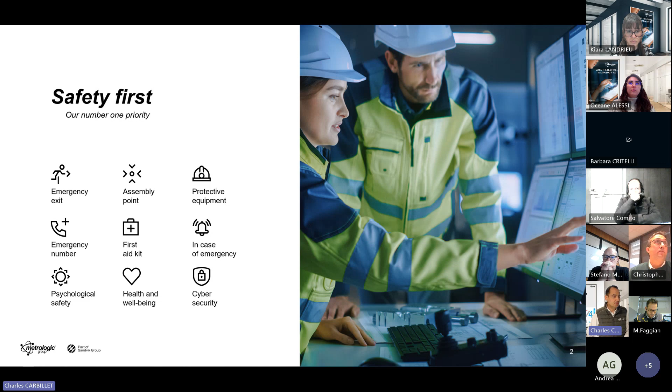Let's speak a little bit about Metrologic. Our headquarters is located in France, close to the Alps in Grenoble, since 1980, and we are still there, really focusing on 3D measurements, CMM retrofit, automation inspection, and inspection services. Now it's over 43 years of experience and knowledge.

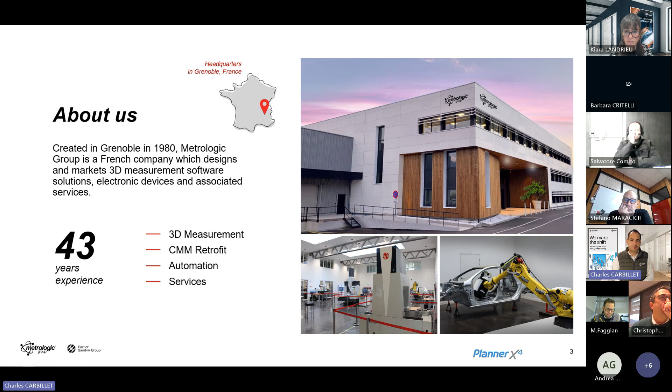You can discover our premises and our showroom on the bottom of this slide. We are located, of course, in Grenoble, France, but also in multiple regions, with 6 different sales offices in the world, as well as through our network of distributors everywhere that can assist you with support, inspection needs, software, services, training, or inspection programming if you need.

Our main activity is really focused on software, because we are completely independent of the device manufacturer. So we focus on inspection software, and we also have CMM retrofit hardware capability. And of course, services—for CMM programming or inspection issues, we have experts available for you everywhere in the world.

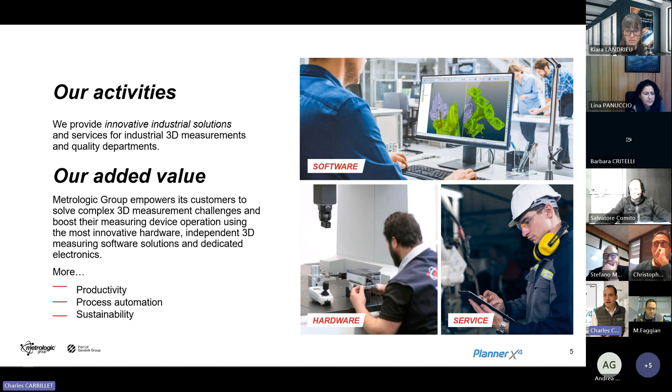Our main goal is to help you increase your productivity, get a robust process automation, and a sustainable solution. Our vision at Metrologic is to focus on manufacturing efficiency and be a collaborative digital platform addressing your daily 3D metrology issues, saving time and productivity, and offering you a good product at every hour of your daily journey.

According to this vision, we have an approach we call the end-to-end process in the inspection environment, with a prepare phase shown on the top right of the slide. Here you see the prepare phase, to prepare the inspection plan that will drive your program phase, execution phase, and the management of the data, which is the next phase—programming with our product Silma.

Execute with our product Metrolog, and manage the data according to connectors to different databases in your ecosystem, like QDAS, QDM, and other PiWeb systems that can be connected to our system. According to that, we have 4 different brands of product: Planner, Silma, Metrolog, and Manager Suite. Let's see where each is located in your environment.

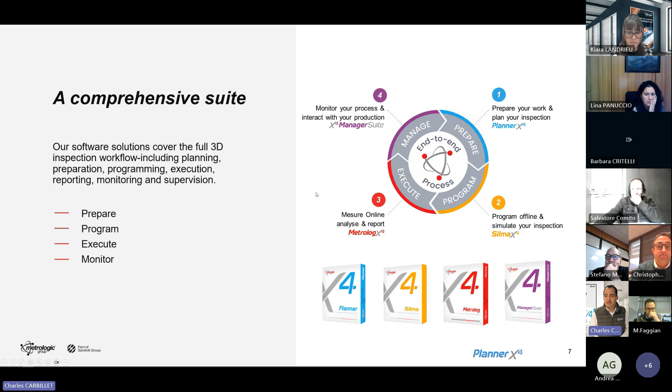This product is clearly located in a different area, a different zone of your plant. The first one, which we're focusing on today, is Planner, which is close to the design, because Planner catches information coming from the CAD design and enriches or adds value to this information, to drive a safer and more robust process for your inspection, leading to the program phase, execution phase, and management of the data, as you can see in this drawing.

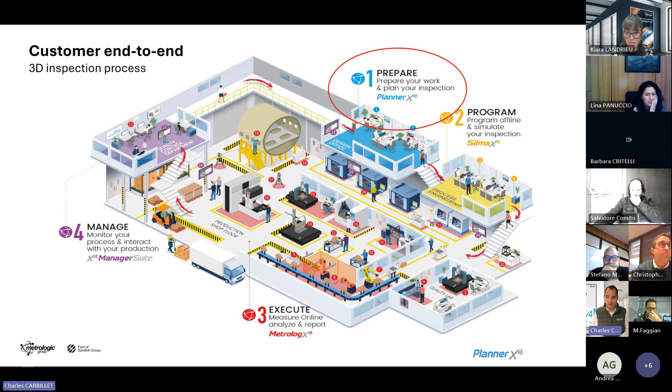Let's now focus on the Planner X4 product, which is our last software capability that we released one month ago. We are in this phase of the scenario. The designer decides to generate a geometry, a model, and add some PMI information or not, or generate a paper that offers the capability to read the information or the expectations of the designer.

Of course, there are many specialists in your organization that are able to read this paper, that have enough knowledge or not. What happens really often is a manual transcription of the GD&T and PMI, because I read my paper and I can interpret it, and my colleague can interpret it in another way. Or maybe some information is missing. I have no contact with the designer, or I can send an email, but I have to produce my part. So it makes a lot of errors or leads to decisions that are not a good way to work.

Of course, the translation and the interpretation can make some errors in my process. And for sure, it requires high inspection skills to be able to read this paper. After that, there are many people that are able to generate a program in their own way. One will do it a first way, another a second way. Of course, it generates multiple programs and ways to measure the same part in the same plant or different plants, or your suppliers' plants, for example. And that will probably give different results.

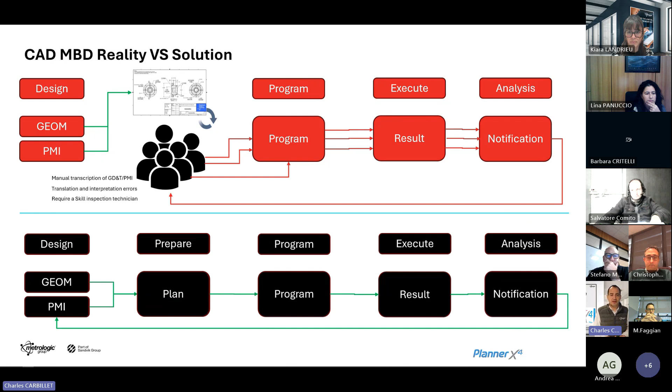The designer will generate his geometry, will generate a PMI or not, and he will go through the Planner product and generate only one unique way to interpret, to transcribe, and fewer errors will be made at this stage. That means only one plan will be transmitted to the programmer, one program will be generated by the programmer, and one way to obtain the result. That means your process will be more and more efficient and robust.

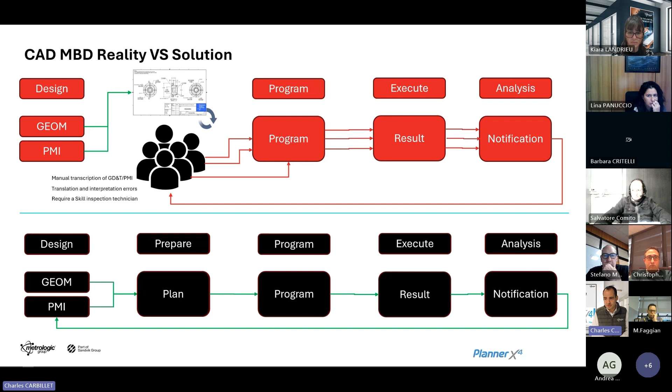To sum up a little bit, now we are going to focus on this product and see what kind of capability the product is made for. First of all, I would like to remind you, this is an offline product. That means it is not connected to a device, it is located in your engineering department, not on the shop floor, not in a programming method department. And this product will be able to import any CAD file supported by Metrologic, including proprietary formats, CATIA V5, CATIA V6, NX, or UG, for example.

At this stage, we will prepare the inspection plan. We will define the features directly by clicking on the CAD, manipulating the CAD, or by using the PMI or the ballooning coming from the designer. If this information is not enough, you will be able to create, associate, or correct your own PMI information or your own ballooning information, because probably during your process, you need to reuse this CAD information. So at this stage you will be able to create all the data necessary to drive your inspection process.

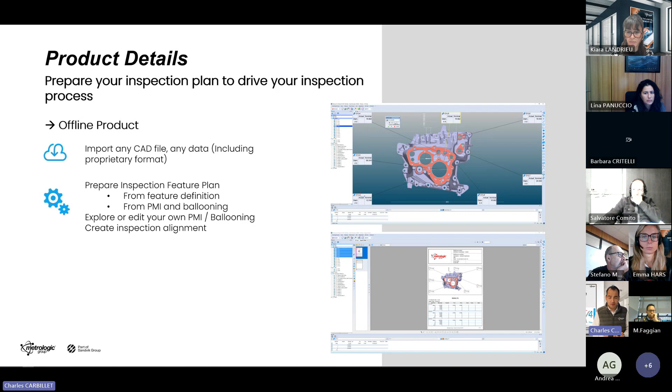If you are keeping the same digital chain with Metrologic products, Metrolog and Silma, you will be able at this stage to create your inspection alignment, to help the user decide which kind of inspection alignment to use. But remember that it's only nominal capability.

If you are still keeping in the same digital way with our Metrologic product, Metrolog or Silma, you will be able also at this stage to create views, prepare your views, prepare your stickers, prepare your report, and why not prepare your exported data in any kind of format supported by Metrologic: TXT, MAA, PRD, so different formats that we are able to support today. You are going to prepare that in order to help the user to say, okay, after the measurement, I'm going to export my data to this kind of format.

At this stage too, a QIF format is available in Planner to export your CAD file data, to go back to your designer, to transmit this information to your designer to add value, or inspection data or nominal inspection data to a QIF format, because you will be able to export this data to a manufacturing application.

As a reminder, it's not possible to do analysis with this product. It's also not able to do the visualization. We have other products for that. It's mainly the viewer product, which is free and available on our website. It's only nominal value data management. That's the capability of Planner in detail, and we will see it later on in the demonstration.

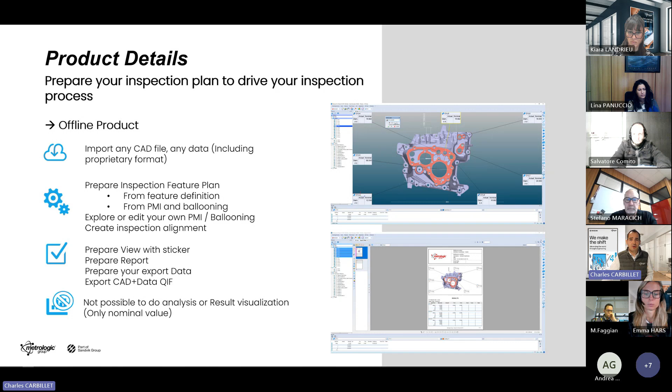The product benefits: why you should use Planner X4. Mainly to consolidate your process, to digitalize your data from your design department to your shop floor department, to use PMI, to start to use more advanced PMI association, or use it, consume it, to interpret it correctly, supported by inspection software, to import your CAD file in order to see what the part looks like, and of course, save time and standardize the operation to save and win time.

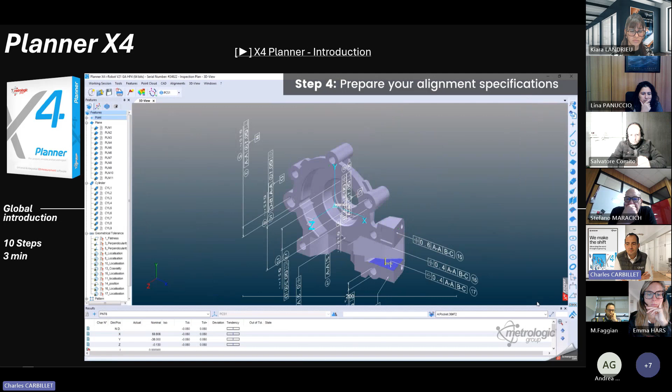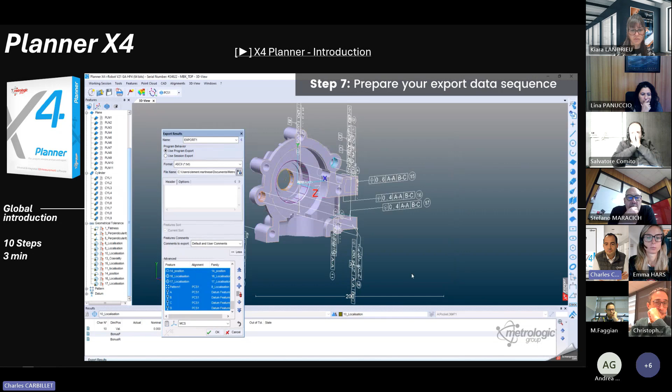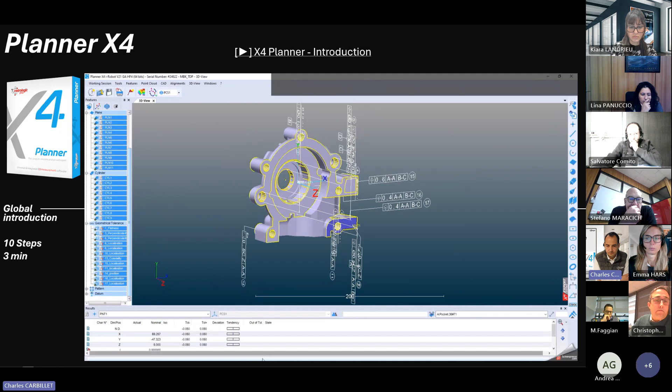Let's discover now the Planner functionality, and it's around 10 steps, 10 functions, 10 capabilities. You will see it in 3 minutes. I'm going to play this video and I will come back in 3 minutes. Here we are. So now you have discovered the 10 functionalities in 3 minutes.

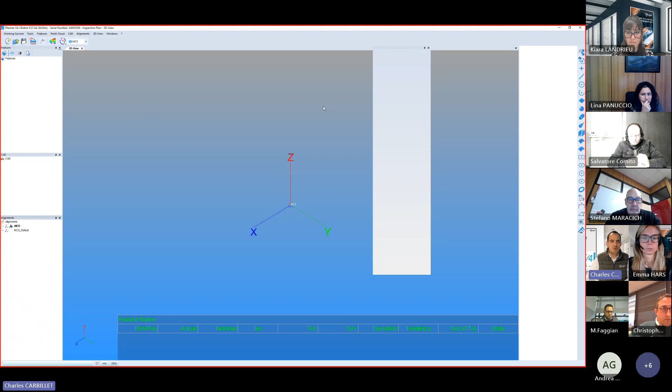All right, so let's use our planner interface just to give a small live demo for you. As you can see, it's available since V21 SP1. Myself, I've got the V22 here on the list. I'm going to open a pre-plan in order to start with some data. It looks like the video one, so you will see it.

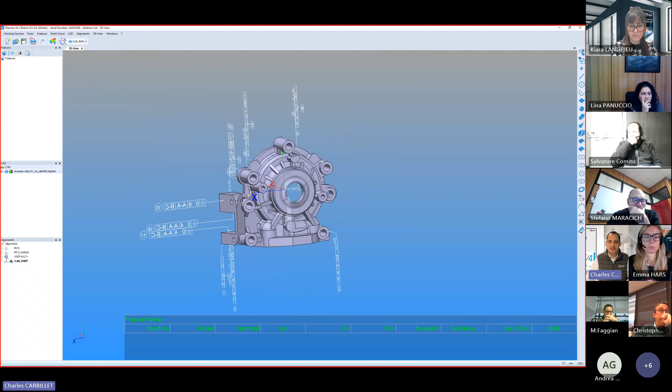As you can see, I've got my CAD data available on the screen. The menus look similar to our application Metrologic and Silma, with working session, tools, feature, point cloud, CAD, alignment, 3D view, and window. So the user experience is quite similar to the current Metrologic and Silma product. And we are here to identify the features. I received this CAD file from my designer, and I would like to explore the data.

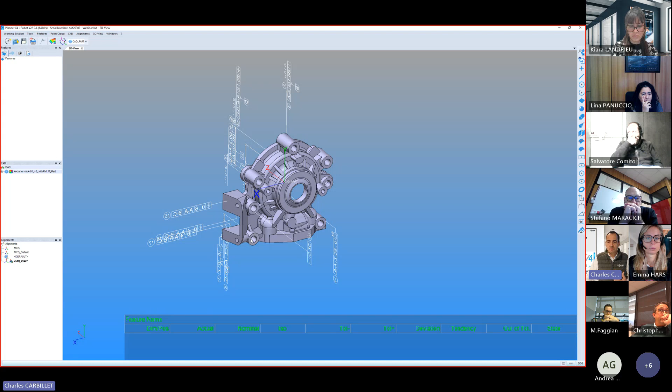So I've got many ways to explore it. I can imagine having no PMI and just clicking on the CAD to identify the features. I would like to prepare to inform my inspection user to measure this circle, measure this plane, measure all the features I want to explore. Or, in this case, I've got the chance that the PMI seems to be quite good. I can check this PMI integrity. I'm going to look at this information.

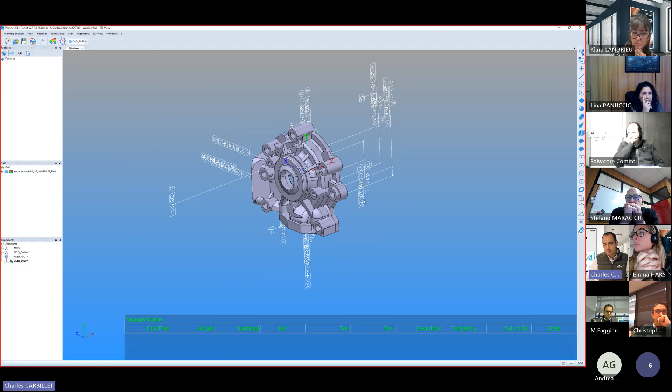It seems there is a lot of information coming from the CAD, and I've got some information here that says to me, okay, it seems that you have 27 semantic items, able to be interpreted by the application. That means it's okay. As it is okay, I'm going to push one button, which is inspection plan collector. It's going to explore all the PMI and define all the necessary features, circle, cylinder, plane, points, to associate.

That means with one click, automatically, I'm going to receive all the necessary features I need to measure, to get a correct interpretation of my tolerances. It's done for the features, but it's also done for the many captures coming from the designer, in order to get exactly the same capability to report the features.

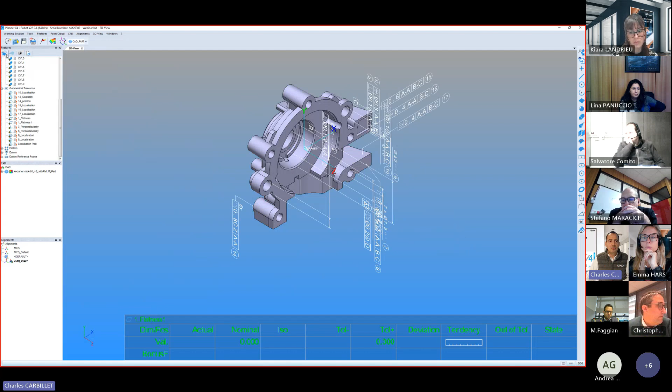As you can see here, okay, I'm happy with that, but maybe on this product, it's missing the flatness of this part, because this part should have enough flatness to get a good mechanical link with the other one. So I'm going to create an additional tolerance here, not from my design phase, but from my inspection or planning phase, to select my plane, select the correct value I would like to investigate, and click on this surface.

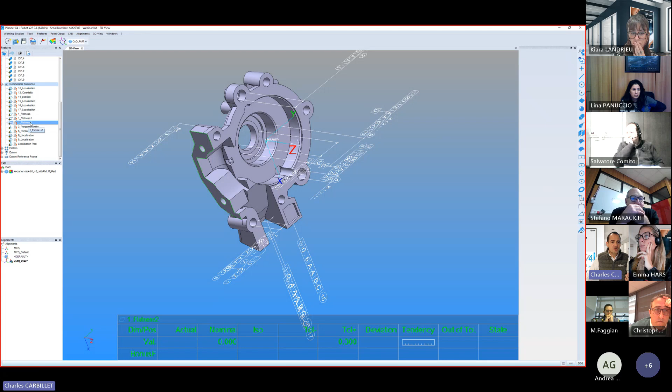Automatically, it has detected the surface plane with the different criteria, and I'm going to generate this feature in my database. As you can see here, it has been added on top. And this is my flatness 2, which is available here. But it's not on my design. It's only on my inspection plan, which I can transmit to Metrolog or export to QIF for another application.

If I make a right click here, I will be able, as I am in the planner phase, to create this PMI inside the CAD. You will see that for the moment on my CAD system, I have no information about that one. So if I look here, sorry, it's not my DRF, but my geometrical one, I have no flatness 2. Flatness 1 is there, but I have no flatness 2. So I will select my flatness 2 and create my CAD PMI.

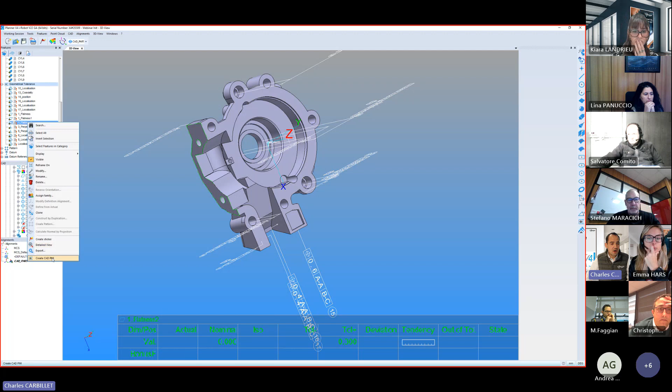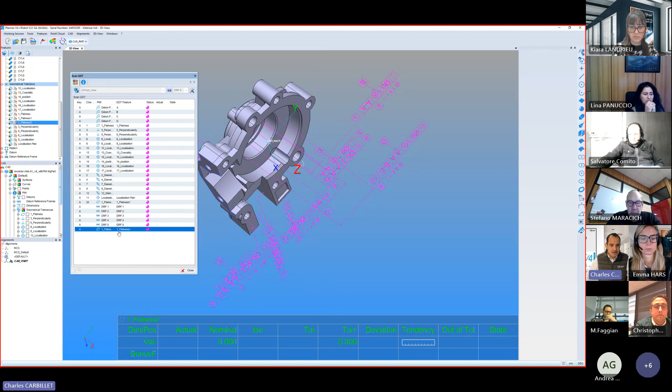And now, if I would like to retransfer this information to my CAD designer, I can export my CAD file to QIF, and he will be able to open it in his system and add information. And I can receive a native one with the correction, do my process again, and get my feature here. I'm going to just add a balloon here, because we are in the case where the feature is already associated to a balloon to do my report, for example.

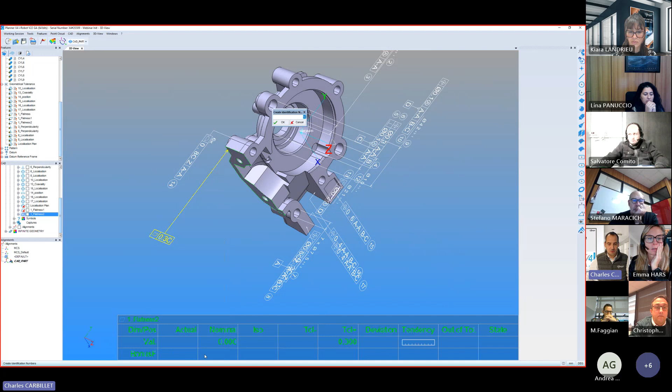And I'm going to make a right click here and create identification numbers. I can select, let's say, my 50 or the numbers I want here. And automatically, it will be created in my CAD file too. And if I check on my CAD file, it has been added here to be able to extract this information directly when I'm going to use my features.

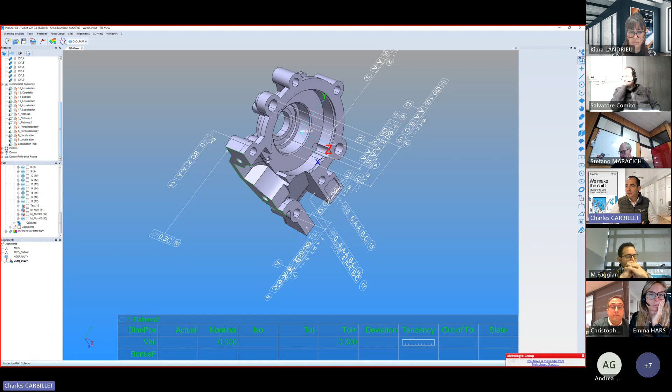If I restart my planner phase, that means now it's already decrypted. If I edit these features and I'm looking at this feature, I will see the 50 numbers that I set in my ballooning information, for example.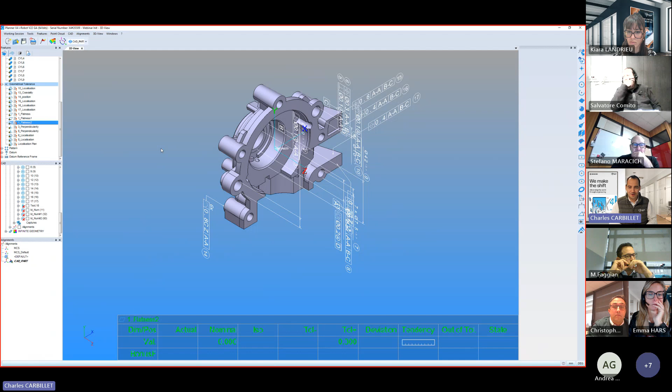Charlie, you have a first question from Christophe in the chat. Christophe, thanks for participating in this webinar. Is it possible to identify which PMI were not generated by the design department and have been added afterwards in the planner? It's a fantastic question, Christophe.

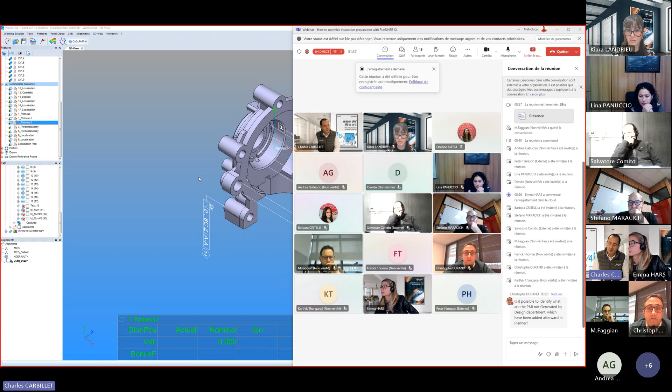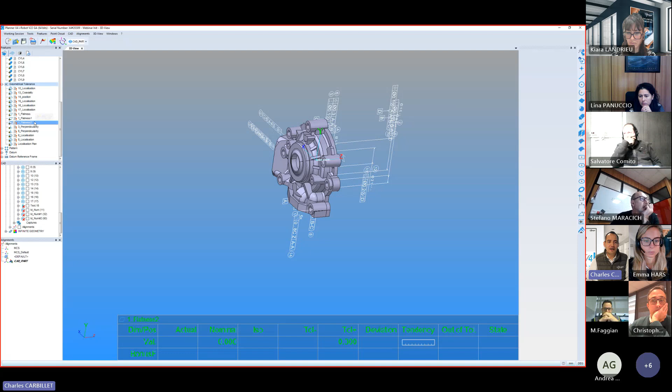It's not yet available because, you see, you are right. We are not able to identify which features are on or off. But in the next version, we will be able to get maybe colors or an indicator showing whether it is coming from the designer or it is added by the inspection preparer. So yes, it will be available soon, I would say in the next release. Thank you, Christophe.

Okay. Can the QIF format be imported into another metrology software? Which one? Good question also, Stefano. My answer would be a kind of basic answer: any software which is able to manage QIF. Today, there are many competitors that are able to use the QIF format. German competitors or, let's say, Quebec competitors can already use the QIF format. And also CAD software; CAD-CAM software is able to manage the QIF format.

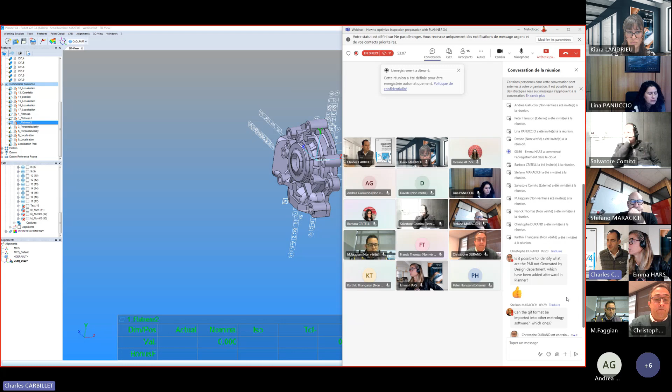Waiting for an additional question. Can planner be sold in this case alone? In this case alone, yeah, for sure. Let me find my presentation and give you a reminder of this process. So planner can be sold to our customers in the design department, close to the designer, to be able to drive and export QIF to offline, online inspection, other solutions. Does that answer your question, Christophe? Okay, thank you, Christophe.

Stefano, about the functionality to move the PMI label, so the ballooning stuff, or the CAD bridge of the PMI. For the moment, it's not available. It's automatically positioned in the context of the CAD information, the different views that we have, and we try to optimize automatically. But some new functionalities are coming in the future to be able to customize mainly the position of the label. Thank you, Stefano.